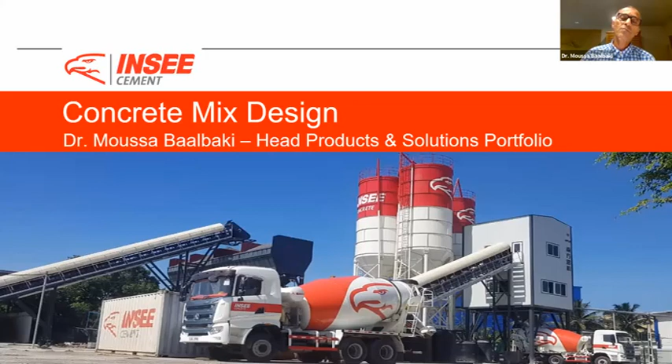As it was mentioned by Engineer Delaney, the topic will be about concrete mix design. For that, I have 3 main learning objectives. The first is to introduce you to the fundamentals of concrete mix design for those who are not familiar with it, because that is important. After that, to present what we call the absolute volume method, because there are many methods of concrete mix design, but this is the basic one, the most important one, that if we master it, we are able to go to the next level and understand mix design to satisfy performance requirements. That is very important. Last but not least, I would like you to be able, at the end of this session, to really design a concrete mix to achieve specific properties for a specific object.

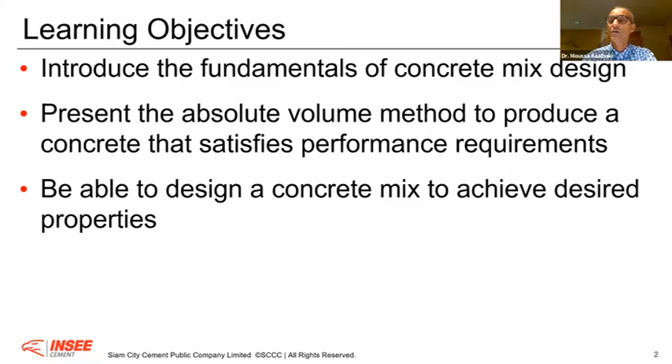And for that, I have an example. It will be, for example, to design for the hotel terrace in Galle Face, a reinforced slab. You are requested to design this reinforced concrete slab. It is 200 millimeters thick, exposed to airborne but not in contact with seawater - that is important to mention. The specified characteristic strength will be 25 megapascal at 28 days on cube, and the slump requirement will be 15 centimeters plus or minus 25. From the statistics, there will be more than 30 consecutive tests available, and the probability that the average of 3 consecutive tests is smaller than the specified characteristic strength is 1%, with 2 MPa standard deviation.

Now, if you talk about concrete, it is a very simple but at the same time very complex material. It is simple because very often people abuse the simplicity of concrete, because when we look at the ingredients - 4 simple ingredients we find in nature: aggregate, sand, water, and cement that is processed - you can produce a concrete where the range of compressive strength can go from 1 megapascal to 100 megapascal. This is really what is important to say here. It is simple, yes, but the technology content is very important.

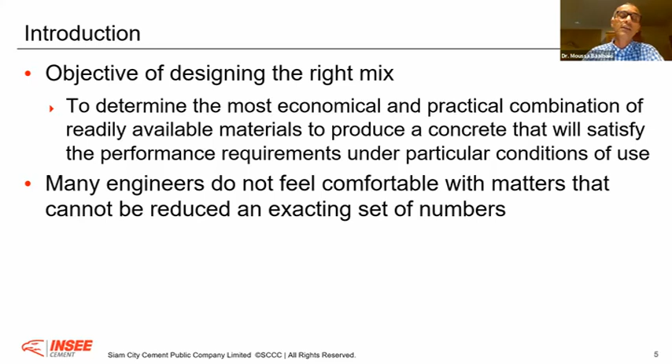And I'm sure it is really important because, as Dishan explained, Sri Lanka is really going to grow with infrastructure, with large infrastructure projects, with state-of-the-art design. Therefore, we need to introduce technology. We need to take all what we know as engineers and really implement it, for the sake of having a better future, a better Sri Lanka.

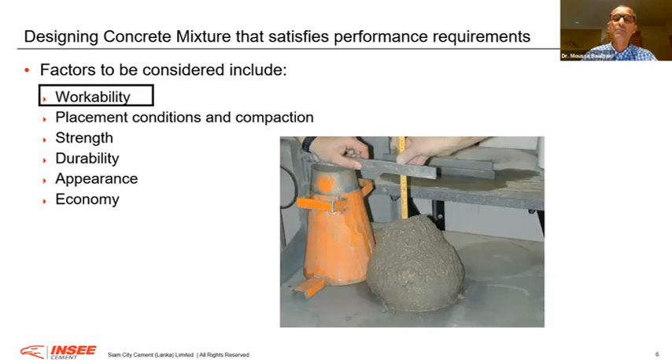It's okay. Therefore, designing concrete that satisfies performance requirements, I have here really six that are the most important. Workability, what I mean by workability is how easily I can place concrete, and very often we talk about slump. I will show you, according to EN standard, there is another way to express workability. Also the placement, we can consolidate concrete in a different way.

This is why, when we design the concrete, we should understand already upstream, before the concrete arrives downstream, how it's going to be transported, how it's going to be placed, and how it's going to be consolidated. These are really important, because very often if we don't take this into consideration - I like workable concrete, but if I place my concrete and know it will be highly vibrated, I can have segregation, I can have bleeding problems. Therefore, this is all important to take into consideration.

After that, the strength. As an engineer, we know this is one of the most important engineering properties. When we talk about structural stability, mechanical stability, we talk about compressive strength, and this is really the strength of concrete. When we look at concrete, at all the engineering properties of concrete, concrete has a lot of future advantage and benefit. Probably one of the weakest points of concrete is its tensile strength, that is why we put reinforcement. But when we look at the strength of concrete, as I said, you can design easily concrete up to 100 megapascal.

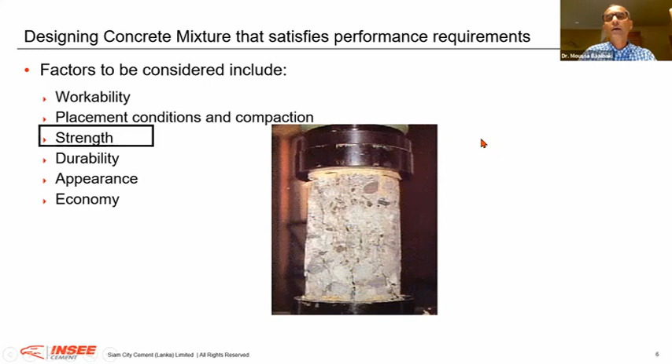One other aspect that is important to satisfy performance requirements is really the aspect of durability. It's really important because very often we miss this important aspect - when we design, it has to last the intended use of the structure. For example, if I build a bridge for 50 years, I don't want that after 25 years I need to repair the bridge. This has a very high social cost. Today, most bridges all around the world are even designed for more than 75 to 100 years. That is why the aspect of durability has to be taken into consideration.

We will see it. After that, the appearance, the color. As an architect - I started my studies in architecture - with concrete we are really able to give more feature for buildings. If you take, for example, fair-faced concrete surface, we can have warm color, we can have cold color, and concrete is the best material for that.

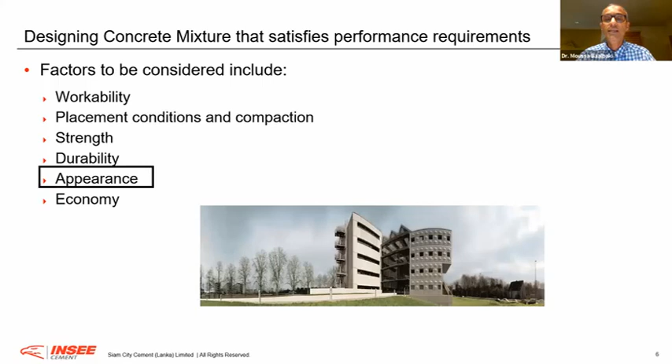Also, what is important is the economy part. We have to be cost effective. Of course, we have to be cost effective. But I would like also here to mention something that is very, very important.

We are a consumer. I will go tomorrow, I will buy, for example, a TV, and they will give me the latest technology, and they will give you maximum 2 or 3 years of guarantee. If I buy the best tire for my car, the Pirelli, whatever, state-of-the-art tire, the guarantee is maximum, again, 3 years. I will pay about $100 US for one tire, the latest technology, and it will last 3 years.

When you take concrete, for example, if we design correctly, a concrete can last minimum 50 years. Therefore, concrete is a very noble material for engineers. And when I say 50 years, this is for a cubic meter that will cost you less than $100 US. It's 2.3 tons of different materials that will last 50 years. This is why if you look around you today, schools, our houses, our universities, our hospitals, whatever you look around you is built with concrete.

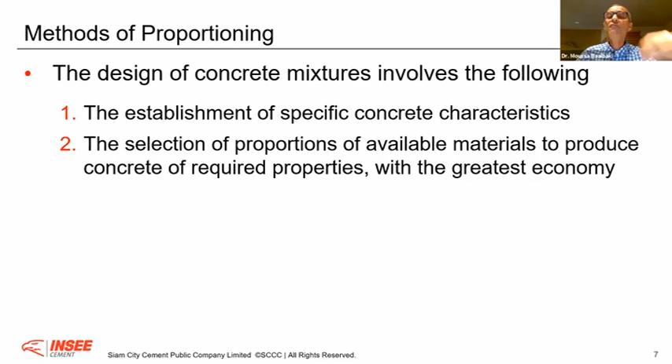That is why it's very important that we are creative, we are innovative, we look at what has been used in different countries, in different projects, and try really fast to implement it in our country. That is important. There are different methods for proportioning concrete mix, but I would like to focus on the basic one, the absolute volume method. Because if you master the absolute volume method, you will understand all other, more sophisticated ways of designing concrete.

If you know the absolute volume method, I can guarantee you, with my more than 25 years of experience, you have more than 90% of the knowledge you need to design, without any durability problem, 50 years concrete. Therefore, the method of proportioning, absolute volume method, is very simple.

Everything is transformed to cubic meter, meaning 1,000 liters. You have your constituents: cement, aggregate, water, sand content, and a certain porosity. I'm not talking about admixtures here, I'll come to that part later because the volume is very low. But if I take the big volume in my cubic meter of concrete, these are 4 constituents plus the porosity. If we know the bulk density of each, and divide the mass by the density, I get the volume. If I sum all this up, I should get my cubic meter. That is important here.

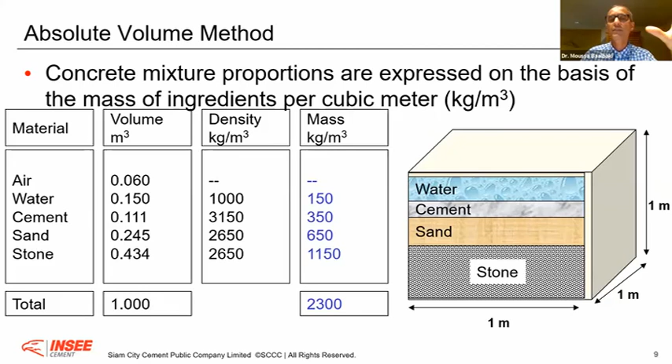Now, selecting mix characteristics: you have to take into consideration the intended use of the concrete, and second, the exposure condition. These are two important elements you should consider - the intended use, and the exposure condition. Is it a house or a bridge? And where is this house - is it in Kandy or is it in Galle Face? That is important, this is what we talk about as exposure condition.

Last but not least, the size and shape of the concrete element. Because in concrete you have constituents of different sizes, starting with the smallest, the cement - in webinar number 2 we'll talk about cement. If I take the average size of cement, let's say 10 microns, but the maximum size of aggregate is 20,000 microns - from 10 microns to 20,000 microns. You have to put all this together and have a concrete with good cohesiveness, so when you mix and place it, you don't have segregation, bleeding, or separation. That is exactly why it is very important to master the basics, and that is where we will start.

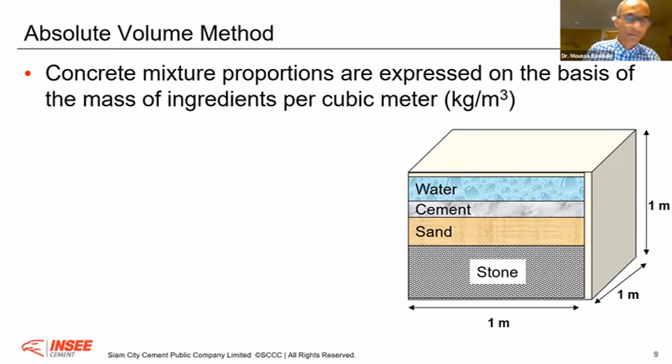Just a moment, looks like the sound is not clear. Okay, sorry, thank you. Sorry, I have to go back. Please tell me if the sound is still not comfortable, okay?

After that, knowing the workability, we have to know how much water I should add in my concrete mix, because water is a very important ingredient - water will hydrate your cement. We'll see this in the second webinar. But at the same time, if we put too much water, it's not good for the concrete. The cement content - how much cement I should put - this is important to know.

The cement type - there are different types in the market, therefore it's very important to understand why we have different types of cement. There is a good reason for that, okay?

Admixtures - it's important also, when it's possible and available, to use, for example, water reducers, or what we call super plasticizers, because those admixtures will help you reduce the amount of water. That is very important to take into consideration.

At the end, when we go from step 1 to step 9, we are able to fill what is left in the cubic meter with the sand. So these are the 10 important steps, and after the 10th step you do what we call the moisture correction. Why do I say moisture correction? Because if you go to the job site and look at sand or aggregate on the piles, very often they are not what we call saturated surface dry.

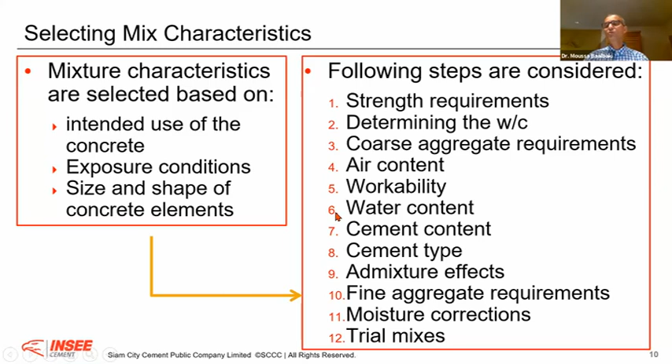Before you go to the trial mix, okay, these are really the steps. I will go through it with you to see how to answer each of the steps.

When it comes to the first step, strength, you have two considerations for the strength. You have the structural design consideration - this is really designed by the engineer, depending on what you design. Is it a 10 story building? Is it a 1 story building? You have to design, and that gives the structural design requirement.

And the durability consideration - when I say durability consideration, this is really the exposure condition. Is it a slab? Is it an indoor slab? Is it an outdoor slab? Is it a bridge? Is it a bridge in the mountains, or a bridge facing the coast? This is all important to know.

Therefore, even though we say durability of concrete is not directly related to strength, strength is still used as a kind of indirect means of assuring adequate durability. And I hope that in the very near future we will have a session in our innovation to industry collaboration space in Peliyagoda, where you will see we have a special room we call the durability space, to really assess the direct - not the indirect, but the direct - durability indicators.

Corrosion, permeability, carbonation, whatever is in terms of durability, you have a direct measurement with state-of-the-art equipment, okay, to allow you to take into consideration this durability consideration, okay?

But at least, what we will see today, up to 50 years you should not have any problem if you follow the different steps. Now, you have first the class of compressive strength. Strength is important, and when I design a concrete, this is the most important engineering property, the class of compressive strength, which is the compressive strength.

Second is the class of consistency. When I say class of consistency in terms of fresh concrete properties, for example in Sri Lanka, which slump I need, that is important, I should specify, okay?

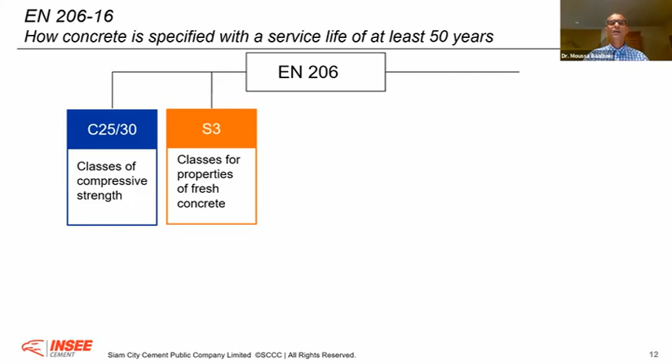The third one is the class of chloride, because you can have concrete exposed to chloride like marine, okay? It could even be not marine, you can use chloride to melt the snow in the mountains. This chloride can, to a certain extent, have a negative impact on corrosion. But at the same time, in your concrete, you have to limit the amount of chloride. We will see, for example, 0.1%, very often used up to 0.4, depending if the concrete is reinforced or post-tensioned. Therefore the class of chloride content is defined in the standard.

Now, very important is the class of exposure. This is very, very important here, because when I design the concrete, I should know, during the lifetime of the concrete, what kind of exposure this concrete is going to withstand. Is it going to be wet always? Is it going to be always dry? Or is it going to go through different cycles of wetting and drying? Is it going to be exposed to chloride, to carbonation, to CO2, to sulfate, whatever it is. Therefore it's very important to consider this aspect in the concrete mix design.

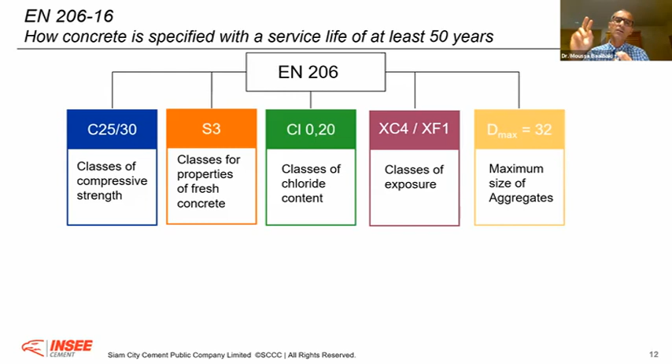Last but not least is the maximum size of aggregate. Here again, in Europe, according to EN206, when I call the ready mix, I have to specify these 5 boxes. I should tell them it's a C2530 concrete, S3 class of consistency, chloride class 0.2, XC4 for example, and the maximum size is 32, for example. Therefore the producer will take this input and translate it into a concrete mix design, and that is what I would like to do with you.

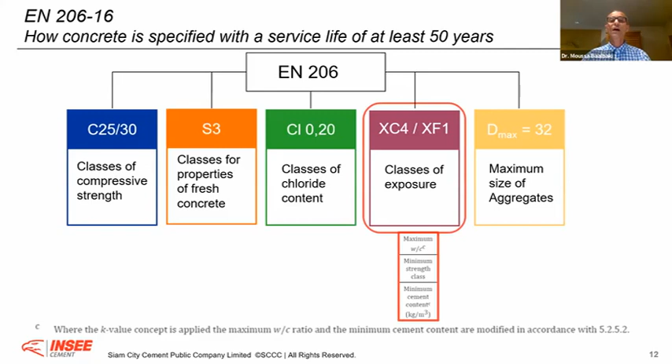Now, when I take the exposure classes, there are 6 exposure classes according to EN206. You will see when I look to the ACI, the American standard is similar, not exactly the same, but very similar. You have, when there is no corrosion or risk, this is X0. Very often these are for lean concrete, or for some foundation where the soil is not contaminated, it is not reinforced, so in this case it's okay, we can go for X0. XC is when you have problems with carbonation.

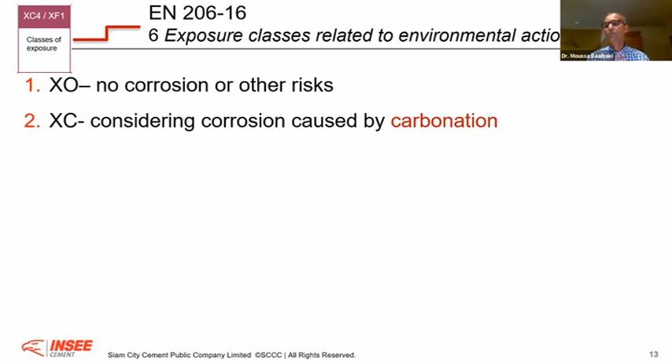It means if your concrete is going to face an environment where soluble CO2 can enter and carbonate your concrete, we will see this. After that, this is the corrosion.

The second mode of corrosion will be XD class. XD is when you have chloride, but not coming from seawater as in XS. Chloride can also be a byproduct from industry, but also chloride can come from the sea. In Switzerland, you don't have sea, so XS does not exist in the EN 206 with the national amendment of Switzerland. But if I go to Spain, they have XS because Spain has the Mediterranean Sea.

After that you have frost. In Sri Lanka we don't have frost, but in a country like Switzerland or Canada, they have winter, so you have a lot of cycles of freezing and thawing, and they also use icing salt to melt the snow on roads. Therefore you need to take this into consideration. Last but not least is the chemical attack, from the soil, from the groundwater. It's very important to check, for example, if you have acidic attack or sulfate - these are all very important to take into consideration.

Now I am not going to go through all of them. I will just consider the XS class. If you understand XS, you will understand all the rest, because I will show you a table that they are all based on. I will not go too much in depth, because we will not have time to explain the mode of deterioration of each of these exposure classes - this could be another topic.

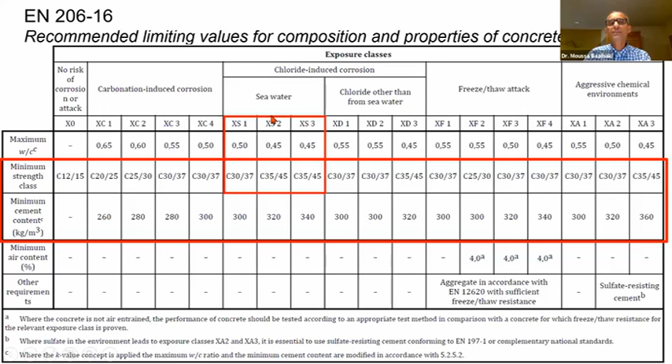So you see, if I take XS, it will be the same for carbonation, for chloride other than seawater, for frost, for aggressive environment like sulfate, all this stuff. So if I take a building in Colombo, minimum it should be XS1, because XS1 is a structure near or on the coast, exposed to airborne salt but not in direct contact with seawater. Even at 25 kilometers from the coast, in Colombo and greater Colombo, normally all the concrete needs to be designed with a minimum of XS1.

This means the water-cement ratio should not be above 0.5 - that's one condition. And we are talking about strength: you cannot design with less than 37 megapascal, even though from a structural point of view 25 megapascal would be enough. Due to the exposure condition with a certain severity, you need to increase your design to 37 megapascal. We are talking about the same thing.

You have different classes - if you go to XS2 and XS3, this is either submerged in water or in the splash zone, and you see the strength required is 45 megapascal.

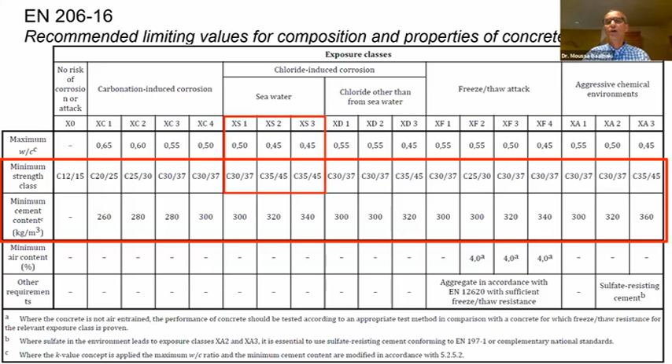45 megapascal - even though probably 35 or 30 megapascal would be enough, that's not how it works. You have to take into consideration the exposure condition. If I take the ACI, they have 4 exposure classes, not 6, because they already include what we have in the European standard. Their F0 is for frost, S0 for sulfate - that is our XA, and this is our XF according to the European standard. This is contact with water, for water permeability they have W0. We don't have this directly in EN206, but we have XA, which is also related to permeability, so it's similar.

For corrosion, they have only one category, called C - C0, C1, C2. In the European standard there are 3: XC for carbonation-related corrosion, XS for corrosion due to chloride from seawater, and XD for chloride not from seawater. That is the difference.

The second difference is that with ACI, if I design, for example, a slab, I need to take the worst condition all the time. I should consider what applies for frost, what applies for sulfate, for contact if it's in contact with water, and for corrosion. For example, this will be F1, S1, W1, and C2. Then I see what is the worst condition and design my concrete according to that - in this case C2. That is how they design. The engineer needs to consider all of them and take the worst case scenario. They also have limiting values, exactly like in the EN.

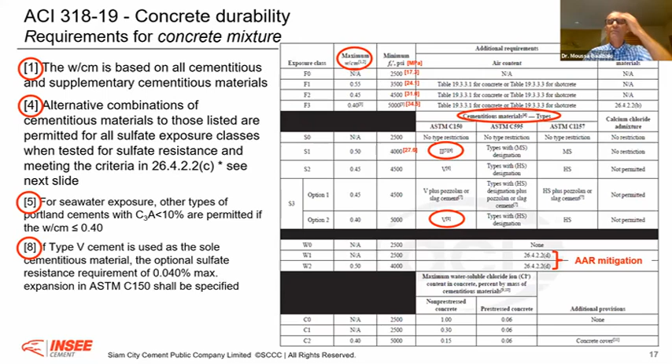Now, as an engineer, when you design, the required strength should be greater than the specified. If I'm specifying 30 MPa, I have to take an allowance for variation in materials. This is why, if you buy concrete, you need to buy from a producer who has a very good quality assurance system, a very good standard deviation, with enough consecutive tests for the mix he is developing for your project. That is important. For example, in Sri Lanka, whenever you design 30, you request 40 - I will explain why. This is, for example, the normal distribution for standard deviation.

If you specify, you have to add a factor K multiplied by the standard deviation to the design. This factor K, if the number of consecutive tests is more than 30, equals 1. A professional ready mix producer will normally just add the standard deviation because the K number should be 1 for him. According to ACI 318, if you look at the Sri Lankan cases, you'll have similar conditions. If the concrete is below or above 45, there's a condition where the required strength will be specified plus 1.34 standard deviation, or another equation, depending on whether the probability that the average of 3 consecutive tests is smaller than the specified strength is acceptable. That is really important.

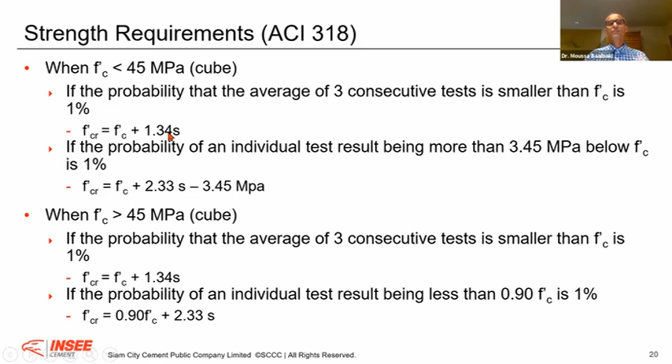If you don't have 30 consecutive tests - 30 or more gives a K factor of 1 - but if you have only between 15 and 29, depending on the number of tests, the K factor increases. It means if I have 50 megapascal, it should already be 55 plus the standard deviation. This is why very often we go to worst cases when we don't have good statistics or a good quality assurance system. Designers, specifiers, or engineers go with the maximum security. Unfortunately this has a certain cost, but this is how it is.

Now, if it is less than 15 consecutive tests, this is, for example, really when you don't have data in the bag market. Therefore, in the bag market, if I design a concrete less than 25, I have to add 7 megapascal. If it is 25, I should design 32 megapascal.

This is why if I look at the cement utility factor in the bag market, cement utility factor is how many kilograms of cement I need to get 1 megapascal. Normally in the ready mix operation, we need less than 10 kilograms, we are around 7-8 kilograms per megapascal. But if I go to the retail market, for my 20 or 25 megapascal, very often I need 13 kilograms. You see, I'm wasting minimum 3 kilograms per megapascal, just because the technology content I'm using is not the optimum one. It's not about the cement.

Come to the determination of the water cement ratio. Here you should take the lowest value that is required to meet either the required strength. For example, I design my slab, I need 25 megapascal. But if my slab is an exterior slab, I have to take durability consideration, and suddenly it's not 25 megapascal, but it's 38 megapascal. Therefore, I need to consider the water cement ratio that is the lowest to achieve the required strength or the durability consideration.

Now, important remark here: within the normal range of strengths used in concrete construction, compressive strength is inversely related to water cement ratio. This is what I said, that you have a very good relation between compressive strength and water cement ratio. That is very, very important, that we need for a set of constituents to have this kind of relation between compressive strength and water cement ratio.

Also, the strength and durability are governed by the quantity of mixing water used per unit of cement. This is why I say, very often people put too much water. Therefore, if you have some negative effect, it's not because it's sometimes the cement or the aggregate, no, because you put too much water.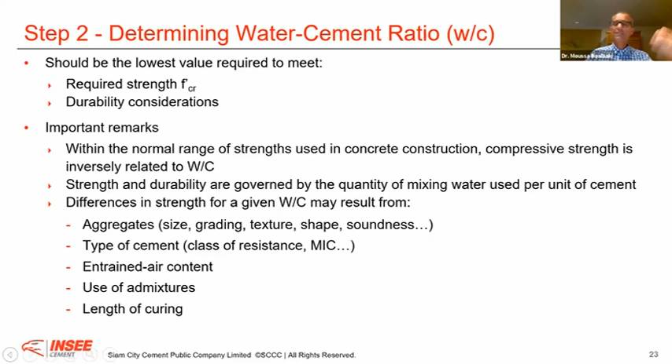When a lot of technology was developed with concrete, it was the time of OPC, and we know OPC develops at 28 days almost more than 80 to 90% of the strength. But if you take, for example, a composite cement, what we call blended cement, those blended cements develop their strength continuously up to 1 year. If you look at 56 days, at 90 days, of a concrete produced with blended cement, or Portland limestone cement as a ternary system, you see the strength continues to gain with time. In the case of OPC, it will be flattened because you have developed the maximum of the potential coming from the clinker. Therefore, you have to take this also into consideration.

In Sri Lanka, for example, very often when people design for the bag market and go for 20 megapascal or 25 megapascal, if you do the real calculation of the water cement ratio, very often they are above 0.65. Yes, you get this compressive strength, but the durability of that concrete is very low, as you can see in the exposure condition.

If I am producing a concrete with water cement ratio above 0.65, you will see it in EN206 - these are all what you call lean concrete. These are not for structural concrete, not for concrete with reinforcement, because the maximum you can go is 0.65.

So as soon as in the bag market, a concrete gang leader or these people who produce the mix add water and go to 0.7, you test it, you get 22 megapascal, you are happy - but you should not be happy, because corrosion will take place within 20 years if your concrete is exposed. You should really keep this in mind.

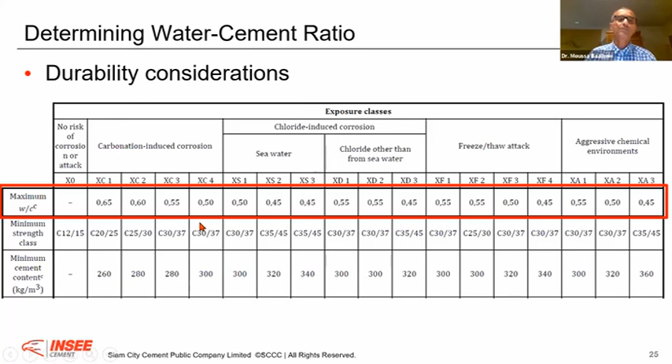Now, step 3 is the coarse aggregate requirements. The coarse aggregate requirement is important here because you need to consider the grading, the nature of the particles, the shape, the porosity, the particle size distribution, the particle size.

At the same time, we should keep in mind that when you have a coarse aggregate graded up to the larger size practical for job conditions, that provides the most economical mix, because around 75% of concrete volume is aggregate. That is a lot. Therefore, it's very important that you optimize your concrete mix design.

For example, if you want to reduce shrinkage cracking, first you optimize your coarse aggregate content in your concrete, because the aggregate will never shrink. This is the anti-shrinking component in your concrete. But if you reduce your aggregate, you increase the volume of paste, and the concrete will shrink. The coarse aggregate also has an influence on workability and water demand.

So you have to find out the optimum - we will see what is the optimum. At the same time, I want to say that when you design high-strength concrete, it's better to go with the smaller size of aggregate.

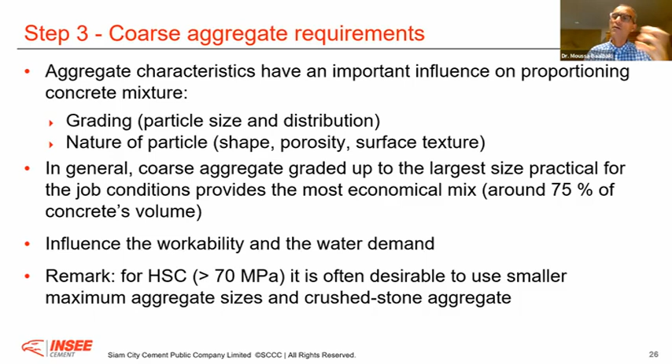Because in high-strength concrete, very often the amount of fines content in your mix is high. You have more than 400 kilograms of cement because you are targeting more than 70 megapascal. Therefore, if your specific surface of the coarse aggregate increases, it's not a problem, because when you reduce the coarse aggregate size, you increase the specific surface - but it's not a problem because you have enough paste, your cement content is high.

Also, depending on your reinforcement, the distance from the reinforcement to the edge of the mold, the distance between two reinforcements, the size of the concrete element, whether it's on grade, or if you have to pump the concrete - these are all pieces of information that you need to consider for the maximum size of aggregate.

For example, in a slab, if my slab thickness is A, the maximum diameter should be 1/3 of the thickness maximum - I cannot go above that. Or if I'm pumping concrete, it should not be more than 1/3 of the diameter of the hose, and never more than 37.5 millimeters. Anyway, nobody will pump that - in Switzerland, we can pump even a 32 millimeter aggregate.

So, just for you, this is the third element that we need to consider. Now, there is also an important factor from the sand that will tell you how much coarse aggregate you need - this is the modulus of fineness of the sand.

If you take the EN, the European countries, they do not use very often the modulus of fineness of the sand. But if you look at the ACI, the modulus of fineness gives you an understanding of how fine your sand is.

Normally for normal concrete, between 2.3 and 3 modulus of fineness is a good number. This is important because if I have a fineness modulus below 2.3, it means my sand is too fine. And if it is more than 3, it means the sand is too coarse.

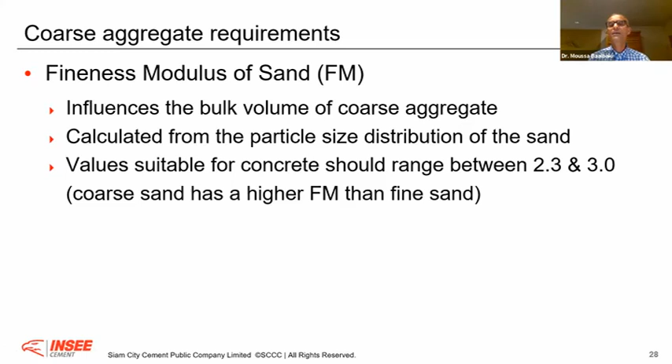Based on this number, I will know how much coarse aggregate I can put.

The second important element is what I call the dry-rodded bulk weight of the coarse aggregate. If I have coarse aggregate with different shape, flakiness, elongation, or a better form, or a different grading, and I take a container, a bucket of 10 liters, fill it and compact it in 3 layers, then weigh it - the better my grading, the more favorable my aggregate shape, the higher will be my dry-rodded bulk density.

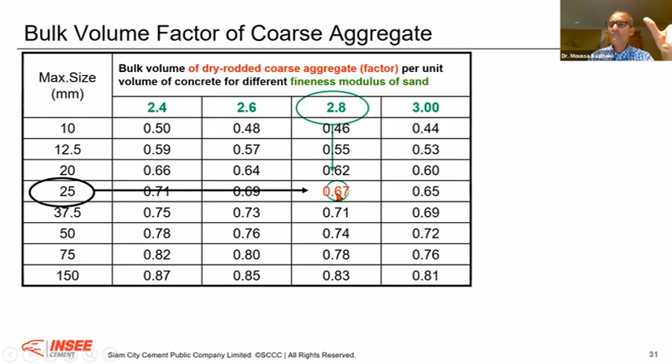For example, if I take 25 millimeter aggregate with a fineness modulus of 2.8, I have the bulk volume factor of 0.67. I will take this factor and multiply it by the dry-rodded bulk density, that is 1,650 in the case we have seen. Therefore, in my mix, if I take this sand and this specific aggregate, I can go to 1,105. Sometimes I cannot go more than 1,000. This is why this factor is very important.

We know now how to get the amount of coarse aggregate. Keep in mind that if you have to pump concrete, you have to reduce very often 10% of coarse aggregate, or if you have a slip form, you increase by 10%. There is some recommendation for this in the standards, and also by practice we know that.

Now, air content - as I said, very often you have to entrain air, but in our case we do not entrain air in Sri Lanka. We do not entrain air in India or in any country in this region, because we don't have a frost problem. Only if I go to North India probably.

If, for example, I take the case in Sri Lanka between 20-25 millimeter coarse aggregate, you can consider between 1.5 to 2% of air in my concrete. Of course, every concrete will have a certain volume of air - that will be like entrapped air, that is really what we can consider. But for example, in severe frost conditions, for example Nordic countries, they can go up to 6% of air.

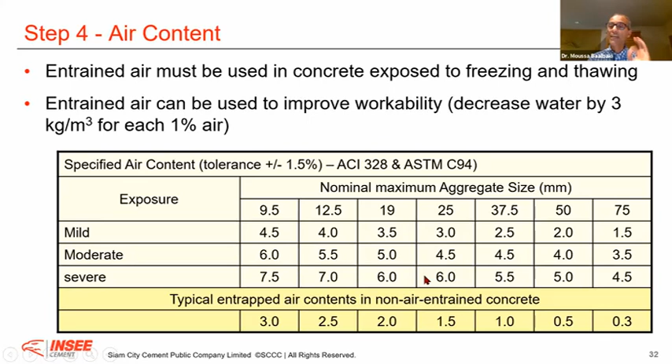If they have this type of coarse aggregate maximum size, you can have almost 4 times more air, but this is not entrapped air, this is entrained air. It's totally different - you use admixture to entrain air.

Now, workability requirement - here also it's the ability for the fresh mix to be transported, placed, compacted, and finished. We remember about the 6 requirements. This is a very important requirement. Otherwise, you can really somehow produce a very good concrete mix, but when it comes to placing the concrete, when it comes to finishing it or consolidating it, the conditions are not favorable.

Therefore the slump is indicative of workability when assessing similar mixtures. This is why we use, for example, the slump test. Now, in EN 206, there are 3 different ways for normal class of consistency. There is what you call the S class, like for example in Portugal, in France, in Spain, in Sri Lanka, in India - but in India it will be different because in India they compact the cone in 4 layers.

All other countries like Sri Lanka compact it in 3 layers, 25 times. In India they will compact it in 4 layers. Therefore, the numbers are not the same. For, let's say, 115mm in Sri Lanka will be different than 115mm in India. This is why I always say it's really important - when we compare numbers, you need to be sure that the numbers are comparable.

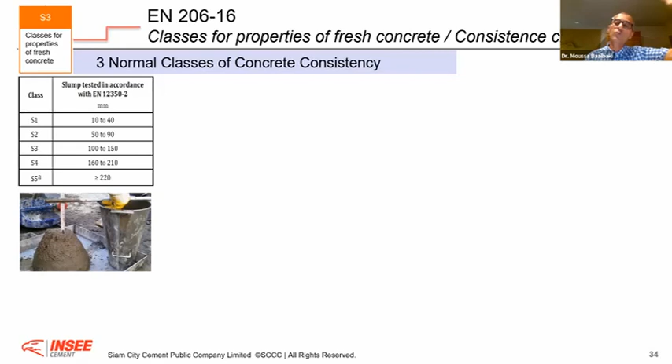And in Sri Lanka, we have this class of consistency. If I look, for example, at our volume of concrete we produce at INSEE concrete, I would say more than 90% is this class of consistency. And more important is the rest time. You know, in Sri Lanka, we always ask for 3 hours. It's very, very challenging.

Now, other countries have a degree of compactability. For example, in Switzerland, they also use the slump test, but they use also this degree of compactability. It's very simple: you have a box, you fill it without compaction, you fill the box with concrete. After that, you vibrate the concrete with a certain vibration frequency and certain time, and you measure the slump.

And the degree of compactability is the ratio between H1, the height, divided by H1 minus the slump. That is the degree of compactability. Lowest is the value, meaning higher is the slump of the concrete. It's normal - if I place this concrete, compact it, and it's not slumpy, it means already the concrete has high compactability. And also there is what we call the flow diameter.

Sometimes in Sri Lanka, we use it, but we don't use the right cone. We use this cone to take the flow. Normally the cone you use for the F class, the flow diameter is smaller. This is the DIN cone, not the Abrams cone, it's a DIN cone. Therefore it's different - you lift the cone and you compact, you give a tap, 15 taps, and therefore you measure the diameter.

And there is also what we call self-compacting concrete. These are concretes that normally flow and go - you don't need to consolidate them. Therefore, there is a special test for them. They use the Abrams cone. You fill the cone, you lift the cone, but without vibration, without compaction, and you measure the slump flow. We call it slump flow.

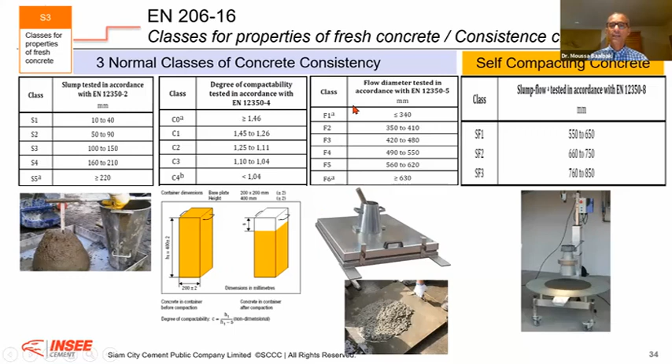Therefore, step number 6 is the water content. The water demand is influenced by the slump requirement - what slump do I need, what is the aggregate size and shape, now we know how to get it, the air content we know, type and content of cement - that will come later, how much and what type and content of my cement, the temperature and the admixture. These will all influence the water content.

Now, if I take the slump, as I said, very often you need a set of material to do this type of experiment, but you can take this table to start with. It's a very good table, very often I use it, it works very well. For example, if you take 150 to 175mm slump for non-air, if I have a concrete of 25mm, I need to put about 200 liters of water if the maximum size of aggregate is 25.

That is why very often in ready-mix operation we use super plasticizer. Therefore, we can cut by almost 20% the amount of water we add. It's okay. Depending on the class of consistency and the maximum size of aggregate,

you have different amounts of water you can use for non-air entrainment and with air entrainment. When you entrain air, because air has the ball bearing effect, you see, here I use 202 liters, here I use only 184, almost 10% less. Because in this case, I have entrained about 6% air, and this is a ball bearing effect. It's like when you have fly ash in your concrete, you have very nice workability. That is really somehow the effect. Therefore, you can use this table also.

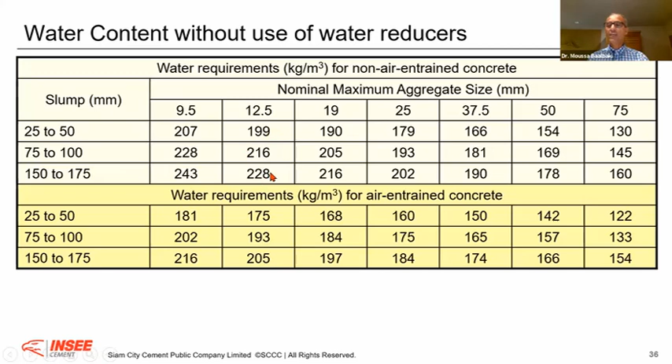Now, cement content - you derive the cement content knowing the water content and the water cement ratio. Now you can calculate the cement content. Very simple, okay? You just have to divide the water that is needed for the required slump by the water cement ratio to fulfill the strength and the durability.

Okay, now also minimum cement content may be specified for the purpose of durability. We will see it probably in the next slide. Finishability - for example, when you have a slab, very often we increase the amount of cement to improve wear resistance. And for the appearance, for vertical surfaces, we need to have a little bit more paste to have a very nice finishing.

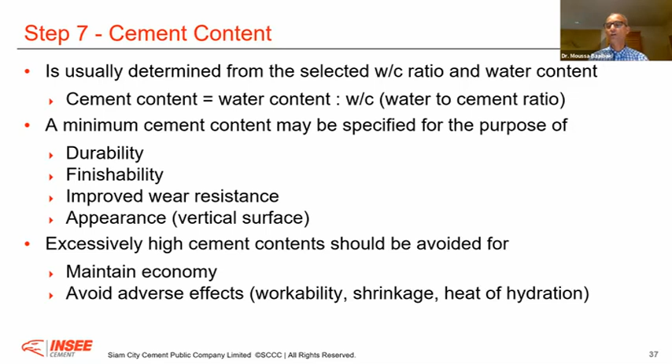Okay, therefore also excessive high cement content should be avoided for economy. 60% of raw material cost in a cubic meter of concrete is cement cost. Therefore, do not abuse, don't put too much cement. This is not good, because it has an adverse effect - if you add more cement, heat of hydration and so on increases. That is why if you produce a concrete above 40 megapascal, normally nobody will do it with OPC. If you do it with OPC, you can have adverse effect, heat, shrinkage, and so on. Or if people use OPC, they will add fly ash somehow, okay?

Now, also there is some recommendation, for example from the Portland Cement Association, if it is frost resistant - this is not our case - or when it is underwater concrete. Underwater concrete, you need to have more than 390 kg of cement. Or if you are really concerned about finishability and durability in flat work, for example, if I take the case of Sri Lanka with 19mm, 20mm, 22mm aggregate, we cannot go below 320. We cannot go below 320. That is exactly how it is the case in Sri Lanka. We have even more than that.

Now, the type of cement. Here again, it's really important that we discuss the type of cement, because when you talk about type of cement, cement is not only compressive strength. Of course, the cement is responsible, is a binder, is really the binder, is the glue of concrete. But cement is more than that. Cement can provide you low heat, can provide you better workability, can provide you better economy, can provide you longer strength, better durability. You have types of cement that can give you this type of future advantage and benefit that you cannot get, for example, from pure OPC.

You cannot get it. If I have to do a foundation, I go pure OPC, I will have full thermal cracking, for example. Just a very simple example, okay? Or if I'm in a sulfate environment, I have OPC and my C3A is above 5%, I can have sulfate attack. This is why I say it's very important here that - the type of cement - this is why in the next webinar I will discuss more on the type of cement so that you can make the link. As I said, it's not about the megapascal. If it is only a question of megapascal, the challenge is very simple. Very easy to achieve 25 megapascal or 40 megapascal. This is not a big challenge.

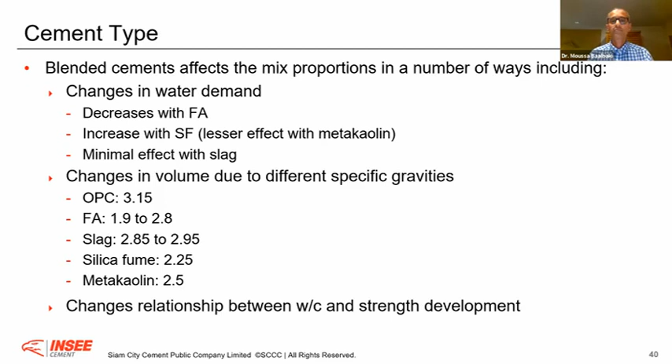And if I'm looking for sustainability, if I'm looking for low CO2 footprint, if I want to be a responsible citizen, a responsible engineer, I have to integrate this technology when we talk about sustainability. Which product gives me less impact on the environment, for example? This is something we will discuss in the next webinar.

Now, these are the different mineral components that we use, for example, in Sri Lanka. High-grade calcium carbonate, high-grade limestone, fly ash from Norochcholai. This is from our own quarry, and ground slag we bring from our operation in the region. Therefore, this is what we call superior blended cement.

These are for sustainable performing concrete, we will discuss it. Therefore, we have different products, and all these products you see have received the green mark certification, and they have different value propositions.

For mass pouring, for example, the Lotus Tower was not developed with Rapid Flow Plus, or Marine Plus, or with Sanstha, because the challenge with this project was a mass, huge foundation. Therefore, we have a value proposition, a product for this.

And so on, for high workability, high durability, for concrete where water cement ratio is high, you need a good strength development. That is why Sanstha is the R class for early strength, because they put too much water, and you get very good cohesiveness. This is Marine Plus, for high strength, for high performance concrete. That's why the value proposition is different, therefore we have different products.

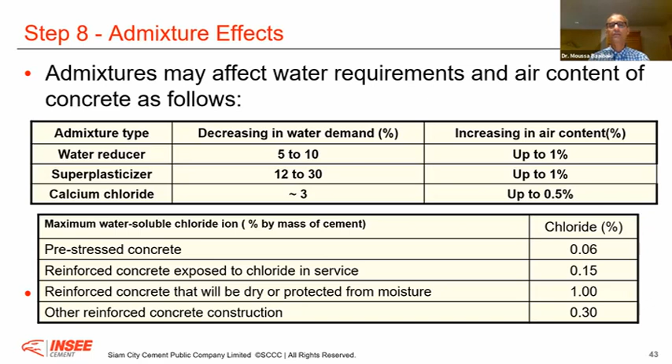That is given, you don't have to invent that. Now, last step. We have discussed how to get the cement, the water, the air, the coarse aggregate. If I know the mass and the density, I know the volume. I know I need 1 cubic meter, therefore I need 1,000 liters. So I should fill what is remaining with the sand. Knowing the density of the sand, I multiply this by the density to get the sand quantity.

And you have your density of your concrete. Done. This is how you get to the concrete at the end. We have seen for each step how to get the cement, the water, the air, the coarse aggregate, and at the end, to get 1 cubic meter, you fill what is remaining from the volume to get 1,000 liters with the sand volume.

Okay, therefore what is important is that this mix design normally is saturated, superficially dry. It means your water cement ratio is the effective water cement ratio. This is the water cement ratio that will provide you a certain compressive strength.

Now very often in nature, when we get the sand, it is not always saturated but superficially dry, because sand has a certain absorption. If the sand is saturated with this absorption, but the surface is dry, this is the condition where, in your mix design, if you add water, this is the effective water. This is the water you calculate for your water cement ratio.

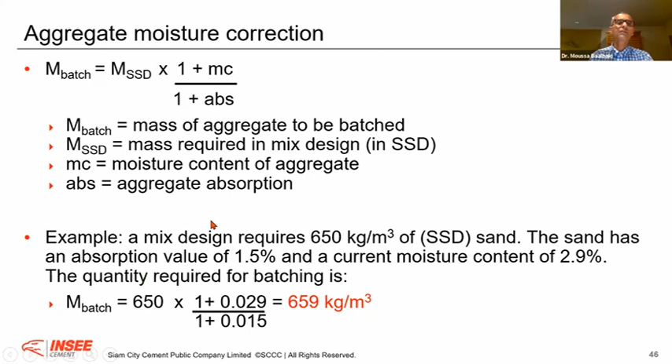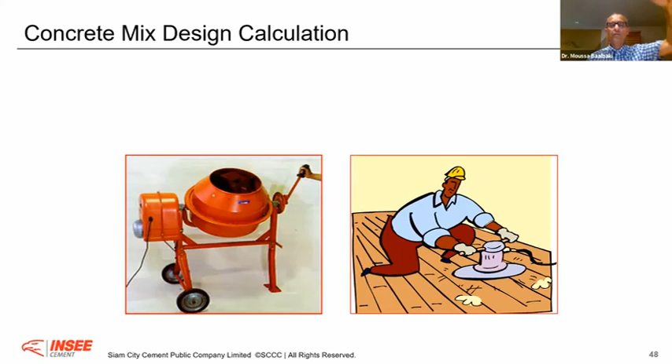Okay, therefore that is somehow with this one I went through the 12 important steps on how to design your concrete. Now the last step is to do a trial. To do a trial, you have designed it, you do a trial, you go to the lab, you mix your concrete, and you characterize it with the properties you would like to assess. For that, I have a kind of exercise that next time we will do together.

For example, you are requested to design a reinforced concrete slab for a terrace hotel in Galle Face, 200 millimeters thick. It is facing the sea water, but not in contact with the water. 25 megapascal is the 28-day specified strength, and the slump is 150 plus minus 25. From the statistics, the standard deviation is 2 megapascal, and there are 30 consecutive tests available. These are the specifications, the conditions for the design.

After that, you have your raw material. You have a coarse aggregate. You are the quality assurance manager of this ready-mix plant, for example. Your aggregate is, let's say, well-graded crushed aggregate. It's a 20 millimeter nominal maximum size. The density is 2.7, the oven dry rodded bulk density is 1,750. The absorption is 0.5 for this coarse aggregate, and the moisture content is 0.5.

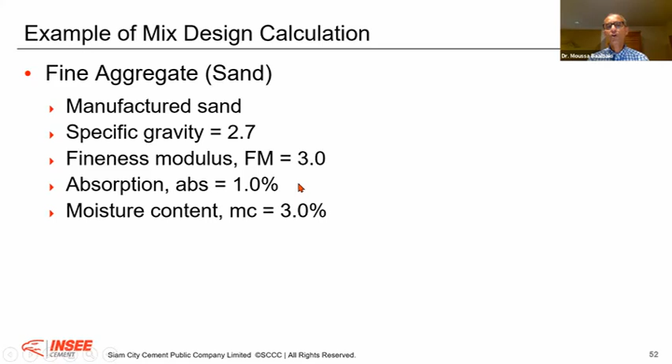Now the sand - it's a manufactured sand. The specific gravity is 2.7. The fineness modulus is 3 - this is what you get when you do your sieving. The absorption is 1%, and this sand has a moisture content of 3%.

Now, we also use admixtures. As a ready mix, you use superplasticizers, and the manufacturer recommends using 1% by weight of cement to achieve 20% water reduction. This superplasticizer has a specific gravity of 1.1.

So you have this input data from the raw materials. We have discussed it all in the presentation, and this is the condition for the design: exposure condition, requirements for the sand, the slump, the statistics, the thickness, and it is reinforced. And importantly, it is facing the sea.

Now, what we will do next time - you see, I have put all the steps from 1 to 12. From the information you have, we will calculate the concrete mix design to meet the condition and specification by following the 12 steps of the absolute volume method, based on ACI 211. That is what we will do next time.

I will take the first 15 to 20 minutes, and we will go through it and correct it together. It's okay, don't feel lost. You will get this presentation, we will do the correction together. You will have the document with you, okay?